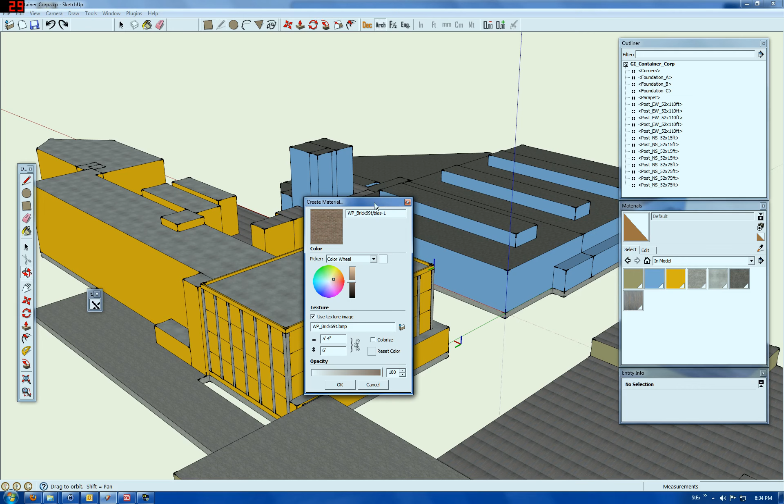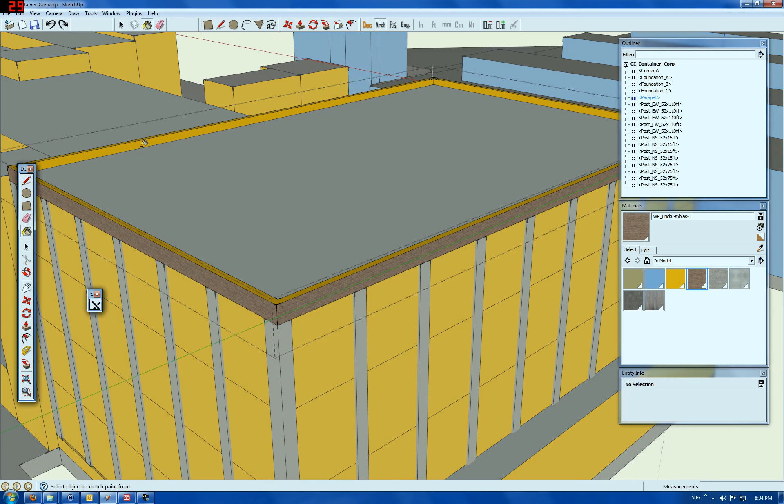So having done that, I'm going to go in and apply this to one place, and one place only for right now, and that is the parapet. Now, as I've said before, you don't apply a texture to a component ever. You want to open up and apply things to the actual faces. And actually, the most simple way right now is take the top face and say select connected faces. That's the first row of connected faces, and that gets all of them at once.

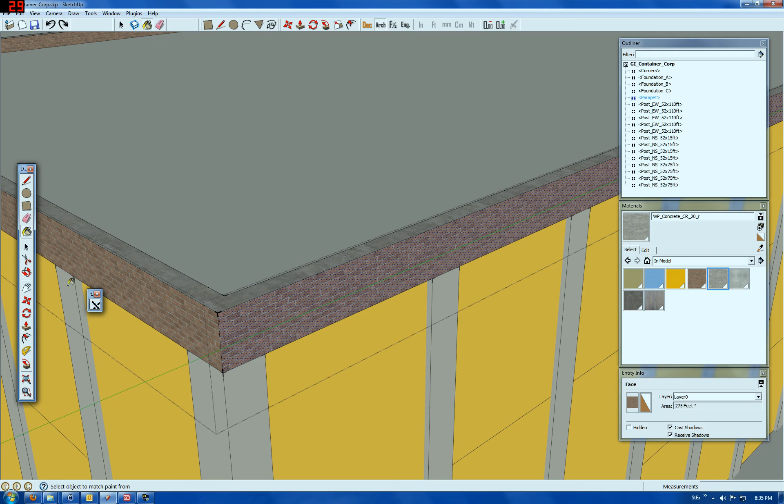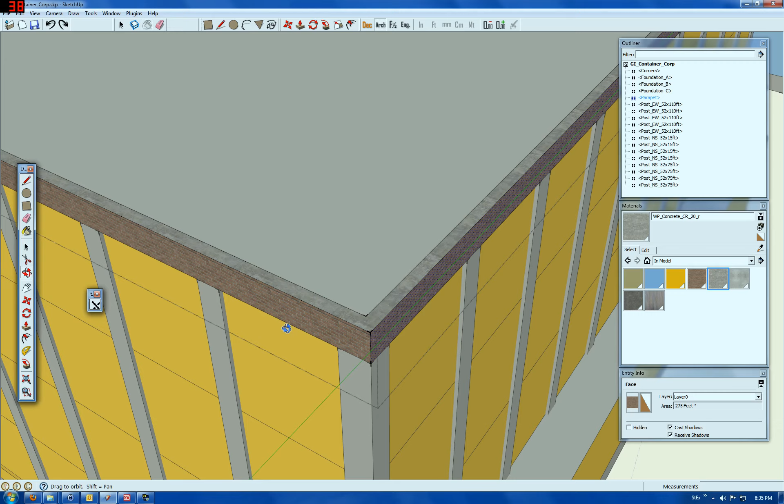Now on this one, I don't know what the top of the parapet actually was. For placeholder purposes, I'm just going to put a concrete texture on that. Now, obviously, in the construction that has to be sealed in some way. I don't know if they used concrete, or they put tile on it, or a metal cap or something, but there was some kind of seal placed on here so the rain wouldn't get into the walls, and so that's what that's for. And so you can see that it runs around both inside and outside.

And now what I want to show you here is, having put that texture in, I'm going to zoom in real close here and roll it on up. We see right here that there's nothing underneath the parapet wall where this cement plaster comes up and touches. There's a gap in there.

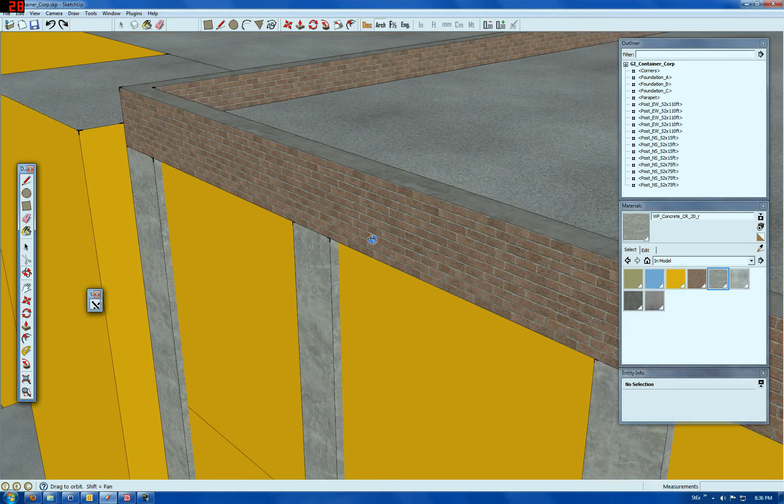And so the simple way for me to solve that is make a copy of the parapet component, Control-C, Control-V, bring it out here somewhere where it's easy to see what I'm doing. Roll it up like this. And then I want to open it, and I'm going to put a face all the way across from one corner to the far corner like this. Let's see, why didn't that? There we go. Got that to work.

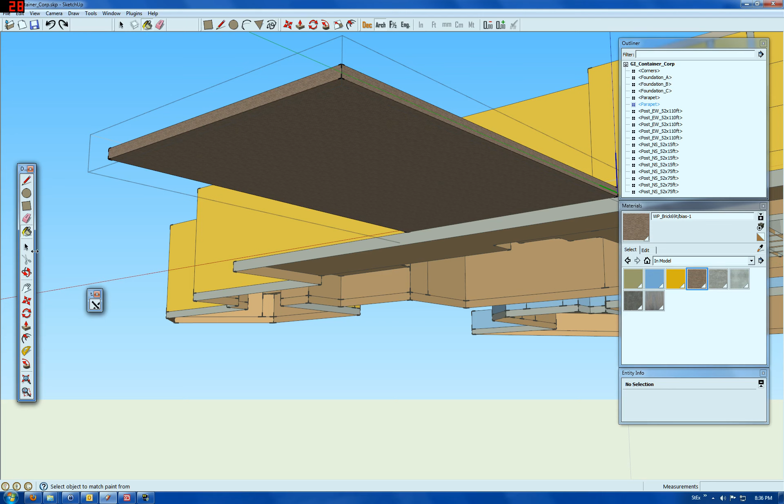Now, what I have here is a 2-poly, very large face. I'm going to texture it for the brick, and I'm going to close it, delete this extra copy, and we'll go back here and see what it looks like. So now we can see where there was a gap in this space, we now have the brick that should be there, and because I put the face all the way across, this one face serves the same purpose here, and we roll it over to the far side and check on these two walls, and in fact it serves the same purpose here.

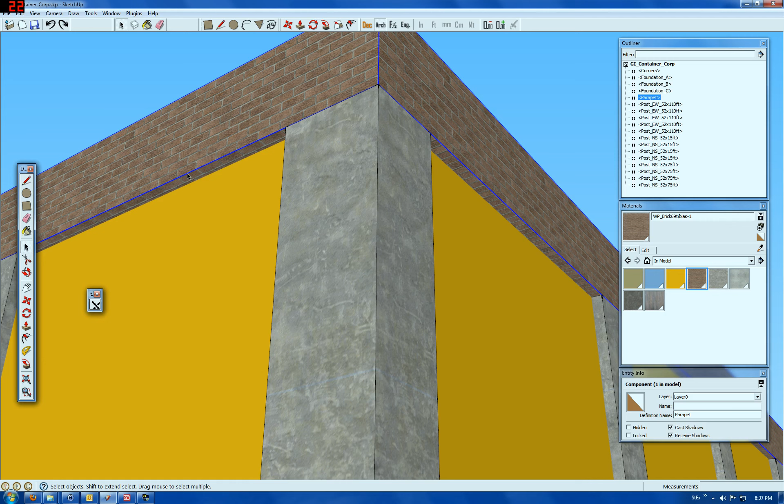So effectively, by adding this large face to the bottom of the parapet here, I'm able to fill this gap on 4 different walls using just 2 polys. And because it's inside a component, the parapet component, it is not going to pick up any extra endpoints from anything I might do elsewhere in the model. Highly recommend this technique.